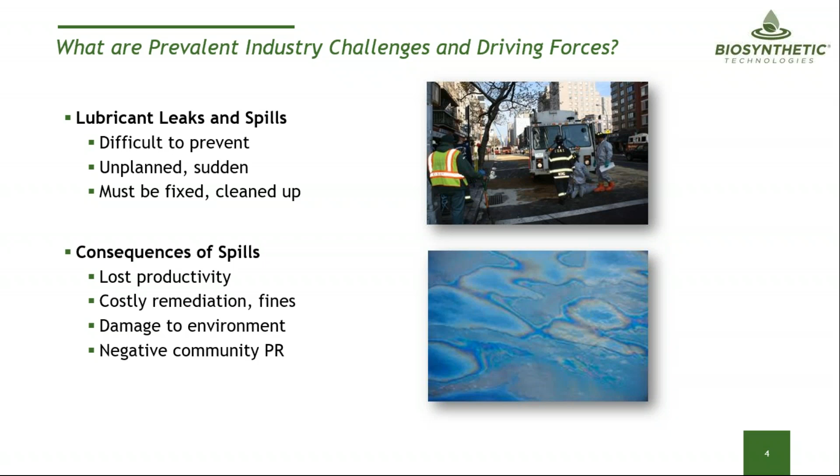So the risks from exposure vary everywhere from the extraordinary, which is a large, catastrophic, big spill that you read about in the newspaper and see in the news, and then the everyday little drips and drops that add up. And what we find is that the little everyday drips and spills can add up and become very common, but add up to become a real problem in the environment, whereas the catastrophic issues with catastrophic spills are well known and very easy to see. And the leaders of these organizations that want to do that are all clamoring for one thing, and they want to be kept out of the headlines with negative public relations.

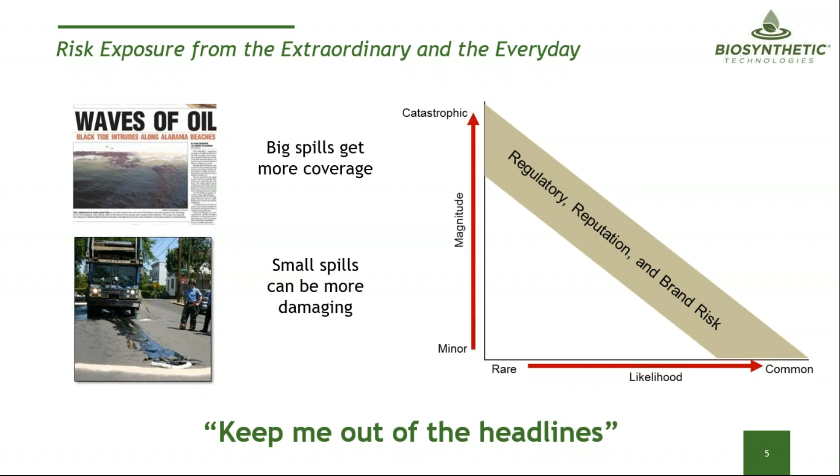So how can we do that? Biolubes can help.

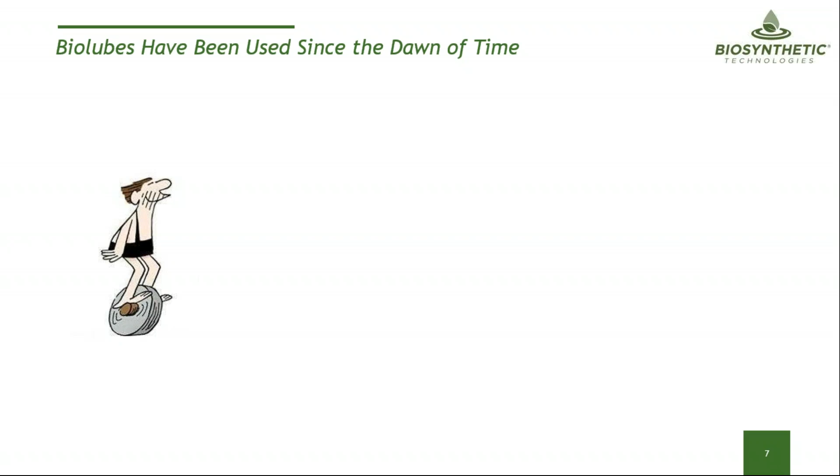Biolubes are not a new idea. They have been around since the dawn of time. It's not hard to imagine that early cave people utilized bio-based lubricants to lubricate their first wheels. It's even easier to imagine that the Trojan horse was lubricated with some type of bio-based lubricant, and they seem to work well.

But it's only recently that biolubes have been able to withstand the tortures and extremes of modern applications. The new lubricants have higher oxidative and thermal stability. They offer enhanced wear protection. They're being tested for long-term durability testing. It's not only important for standard industry tests to be run dry, but also wet. Formulations must be retested regularly, and each and every component within a system, whether it's a hydraulic system or a gear system or an engine system, must be evaluated to make sure that a biolubricant works as well as its conventional counterparts.

The formulators of bio-based oils have gotten smarter. The technology has changed.

These products are being developed specifically for their application in mind. A lot more testing has been done. More emphasis has been focused on compatibility, not only with all the individual components, but also what happens when there's contamination from other types of lubricants. Also important is utilizing the right product in the right application.

You might be able to use a vegetable-based lubricant in a light-duty application like a lawnmower or a reel mower, but you certainly couldn't put that into a heavy-duty truck or a mining piece of equipment. The lubricant manufacturers have been working much more closely with the OEMs, the original equipment manufacturers, demonstrating over the span of time field-proven performance.

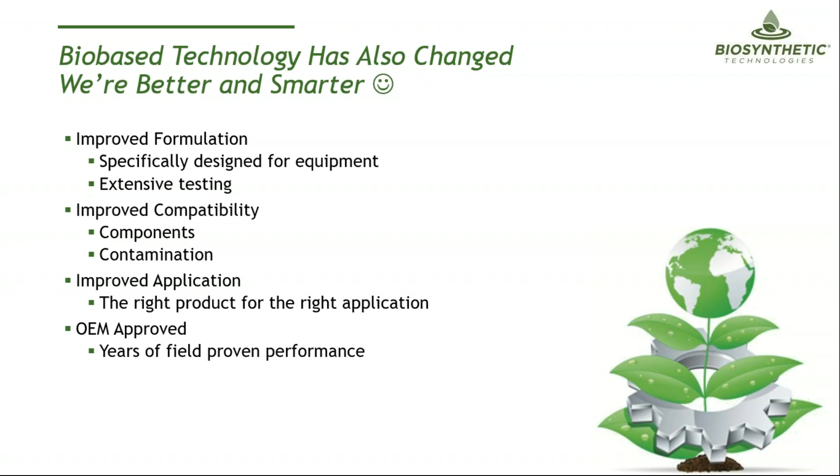Sustainability used to be a very easy benchmark for most people. Several decades ago, when somebody was claiming sustainability, they were looking for renewable content or bio content. They wanted it to be biodegradable and not so toxic, so it's safer for the environment. That was phase one. Phase two was, well, it's got to work in the equipment, so it must be as good or better than petroleum-based products.

Goal number four is it's got to be price comparative. And as the interest in sustainability has been exploding, we're now analyzing carbon footprint, life cycle assessment, and what is the social and economic impact of these types of products.

At Biosynthetic Technologies, we believe in circular sustainability. We're searching for carbon negative manufacturing, sustainable agriculture, and sustainable economy. So how do we approach that?

Well, we first start with the raw material aspects. Our raw materials, we try not to compete with food, and we look at crops that can be harvested multiple times from a single planting.

We're looking at carbon negative. For each metric ton of our biosynthetic products, we are consuming 9 tons of carbon dioxide. So when it leaves our gate, we call it cradle to gate or cradle to crate, it comes out in a carbon negative perspective.

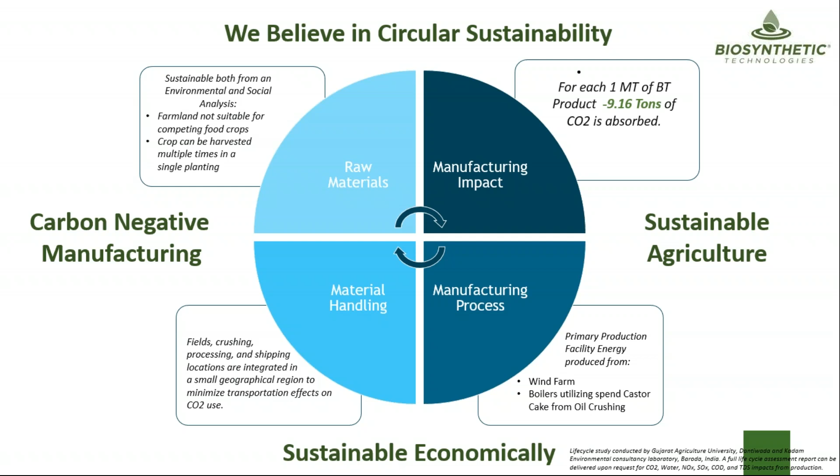Our material handling is located very close to where the plants are being utilized or grown. So we're not shipping beans and materials across a large amount of area, thereby continuing to reduce our carbon footprint. Also, our manufacturing facilities utilize wind for the electricity and operate their boilers by using crushed cake from the oil crushing.

There's a lot of confusion in the industry because there are so many different types of eco-label specification. The United States EPA has their vessel general permit. The United States Department of Agriculture has their bio-preferred program. There's the eco-label, the Nordic Swan, German Blue Angel, just to name a couple of them.

The ISO standards and classifications classify really 4 types of environmental fluids, and then some newer developed ones. So there are hydraulic environmental triglycerides, HETG, which are basically vegetable oils. There's the polyalkylene glycols, the HEPG. There's a variety of synthetic esters, HEES, and now there are some new secondary esters, which are called estolides, and that's the type of molecules that Biosynthetic Technologies works with mostly.

And then there's also polyalpha olefins and related products that are called HEPR. There are also some newer eco-hydrocarbons or renewable hydrocarbons on the market that also offer environmental acceptability, that are not classically defined by the ISO standard.

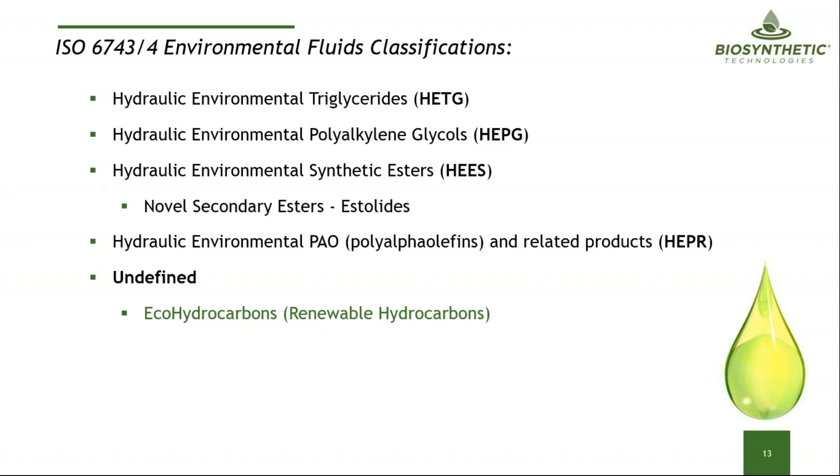So when you're selecting a biolube for your fleet, what are some of the things you need to look at? Well, you want to make sure that it's sustainably sourced, very importantly, that it is readily or ultimately biodegradable, that it meets ecotoxicity standards, that it's non-bioaccumulating, that it has good oxidative stability, which means the ability to work with heat and long durability. There's hydrolytic stability, which is the ability to withstand water.

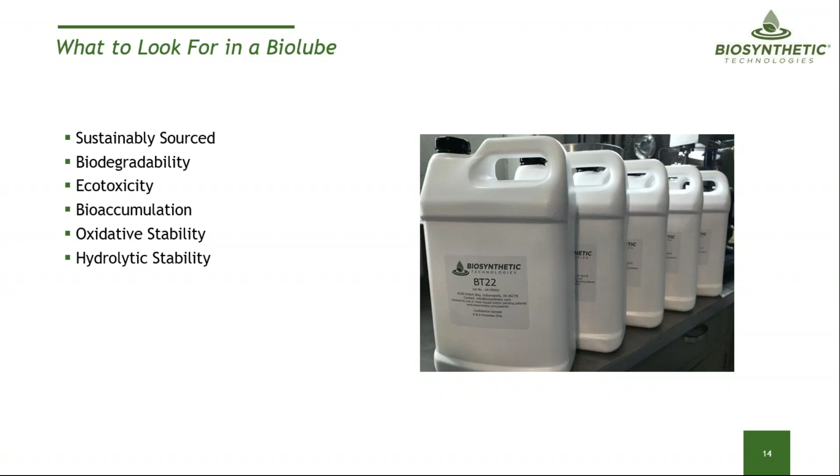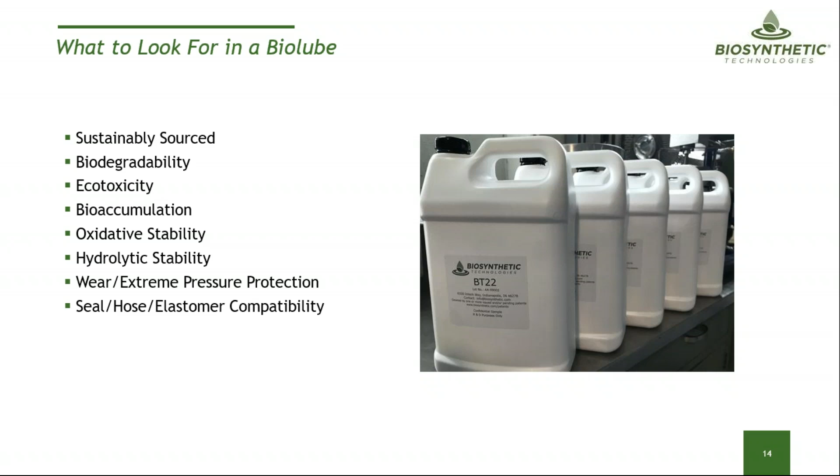It needs to handle extreme pressure and wear of modern equipment. It needs to be compatible with seals and hoses and various elastomers. And you need to find the right product for the right application.

Here's a chart that shows some of the things you want to look at and where the applications are, where you would utilize it. Vegetable-based oil can be used in a light duty, short change-out interval, low operating temperatures. Polyglycols are extremely fire resistant, but need to be especially designed for their system.

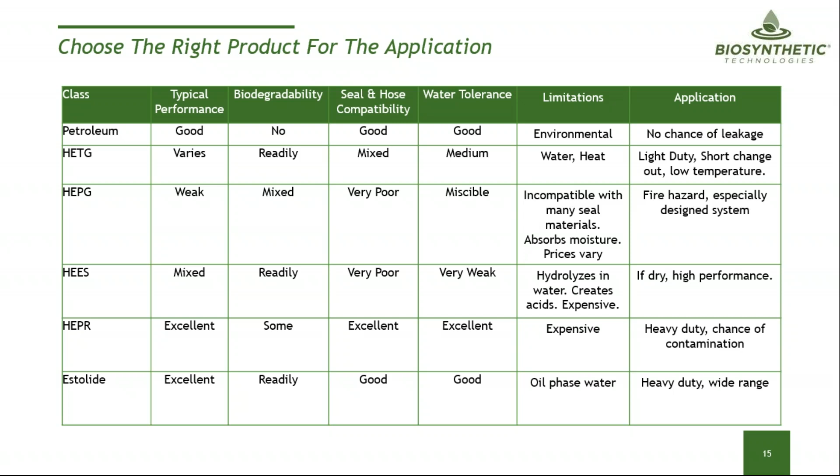Synthetic esters, for the most part, work really well when it's dry and offer good oxidative stability. The HEPR, the PAO, and related products can handle heavy duties, and even when there's a chance of contamination from petroleum. And the estolides offer a good range of performance, offer heavy duty application for a wide range of applications.

There are a lot of applications in clean fleets, starting with engine oils, but also hydraulic fluids, gear oils, driveline oils, greases, tractor fluids, cleaners, and absorbents.

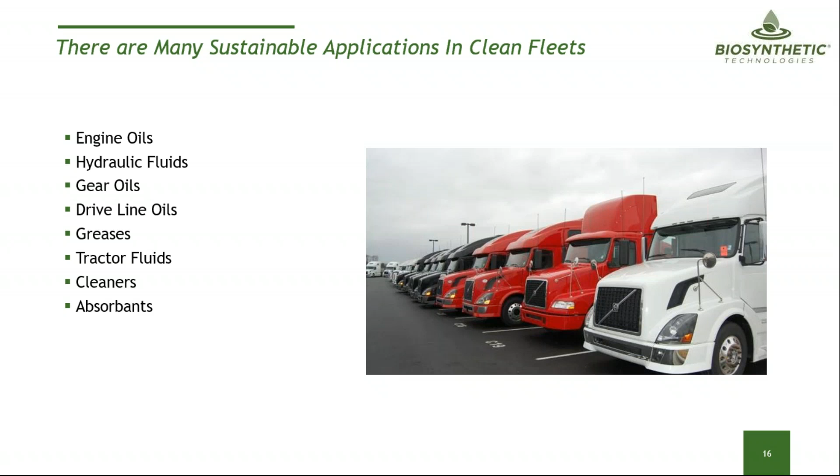I'd like to talk a little bit about bio-based synthetic passenger car motor oil. Biosynthetic Technologies has an API, American Petroleum Institute certified SN-RC 5W-20 and 5W-30 motor oil. That makes up a large amount of the motor oil sold in the United States. It is approved by the American Petroleum Institute and is available for sale on Amazon.

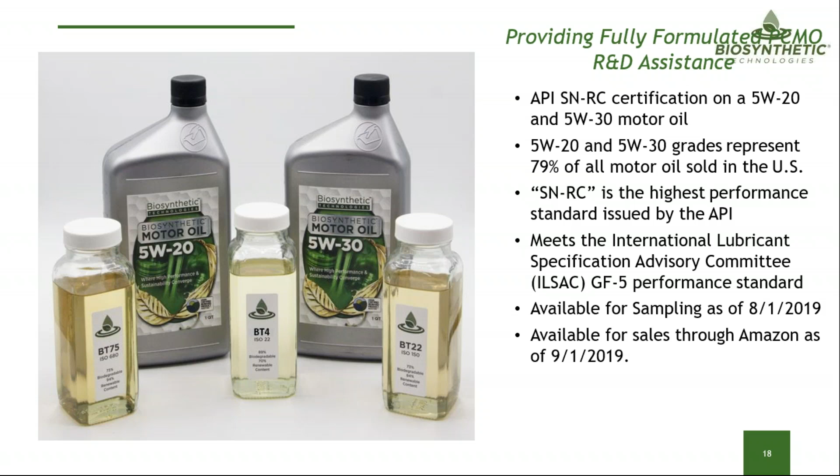We did a test, we've done multiple tests with this. One test we're very proud of was a 150,000-mile taxi cab fleet under severe stop-and-go conditions in Las Vegas, Nevada, which is hot and dry. You can see the engine on the right is clean as if it was brand new, the engine which utilized the Estolide synthetic version. The engine on the left used a petroleum product, and you can see significant buildup of sludge and varnish. The change-out intervals in both the petroleum and the Estolides were targeted at 7,500-mile change-out, but frequently went to 10,000 miles because it's hard to get taxi cabs back home when they're out working and making money.

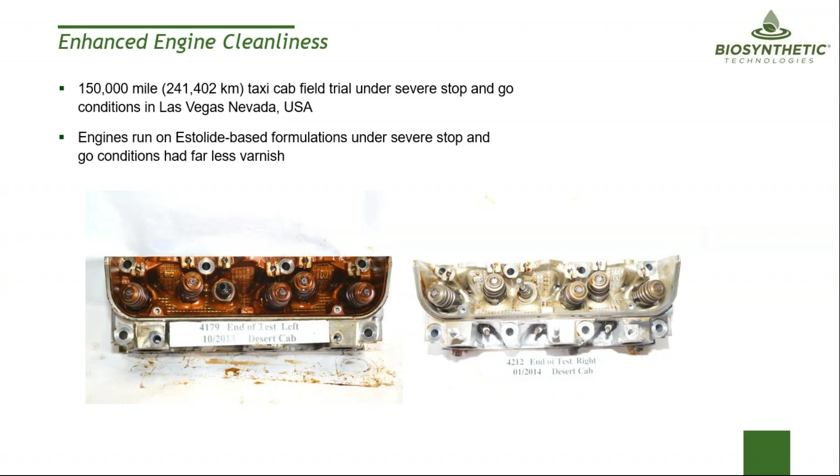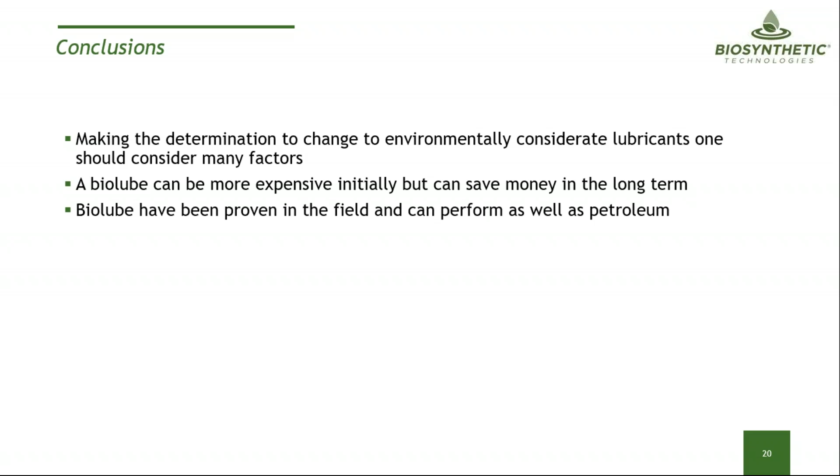So in conclusion, there's a lot to consider when making a determination to change to environmentally considerate lubricants. You've got to consider many different factors. Sometimes a biolube can be more expensive initially, but can save you money in the long term. Many different types of biolubes have been proven in the field and can show that they perform every bit as well as petroleum counterparts.

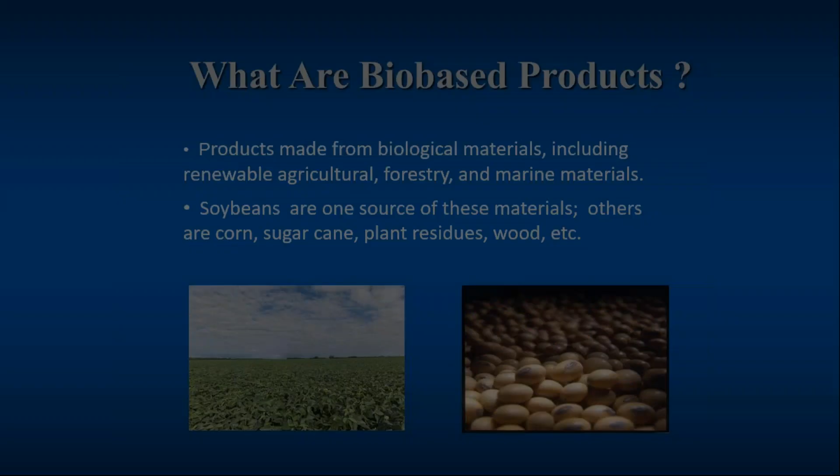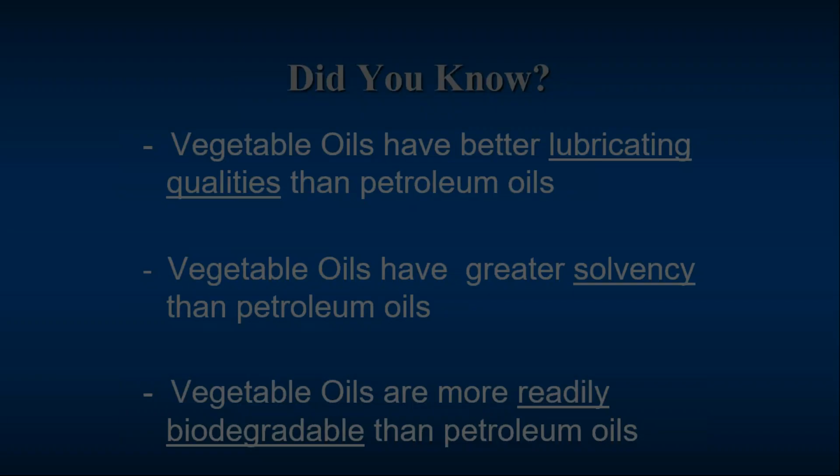I guess one thing we'd like to see is do people understand the benefits of vegetable oils? We always use petroleum oils, and now we're talking about vegetable oils, but vegetable oils actually have better lubricating qualities than petroleum oils. They have greater solvency than petroleum oils, and vegetable oils are more readily biodegradable than petroleum oils. Which makes them excellent substitutions for products that traditionally have used petroleum products. The vegetable oil products and the bio-based products are equal to, and in many applications, better performing than petroleum-based products. We'll see some of those applications as we go through this slide presentation.

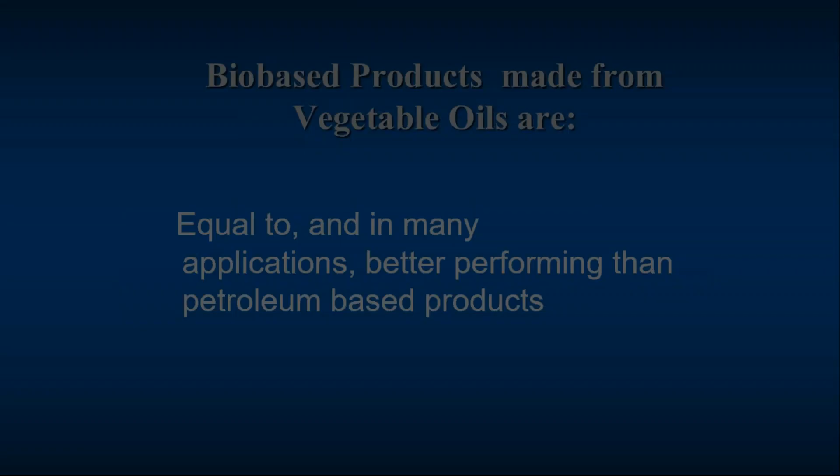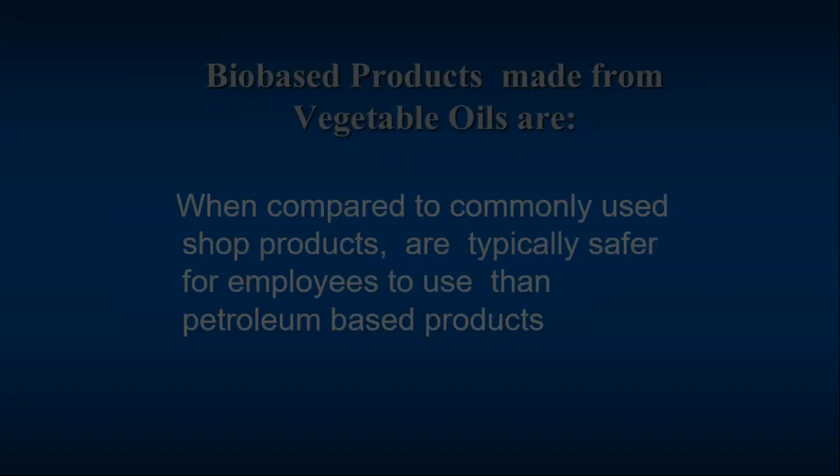One of the really cool things about the vegetable oil products and the bio-based products is when they're compared to commonly used shop products, they are typically safer for employees to use than the petroleum-based products. They're typically found to be more readily biodegradable and less toxic to the environment than petroleum-based products.

We found very much success in using these products at Pictured Rocks National Lakeshore when I was there as a facility manager and fleet manager. We started in 1998 to demonstrate the products. We got grants from the Department of Energy to purchase products that were in development. These products weren't available on the shelf yet. As Mark explained, they'd been in the making for over 20 years, and we started utilizing them when they became available to see how well they worked.

We started off with biodiesel, typically running the B20 blend, although we did use up to B100 during the warmer seasons. What was really interesting about Pictured Rocks is that it's up in the Upper Peninsula of Michigan, so we were in cold country, and we demonstrated the successful use of splash blending of biodiesel in cold climates.

We were able to find hydraulic fluids and put them in our lifts, the lift devices on our plow trucks, the hydraulic systems of our backhoe loaders, and certainly floor lifts. We did have a spill or release one time with one of the floor lifts, and what we found was the regulators were less intense toward the cleanup activities in getting those releases mitigated.

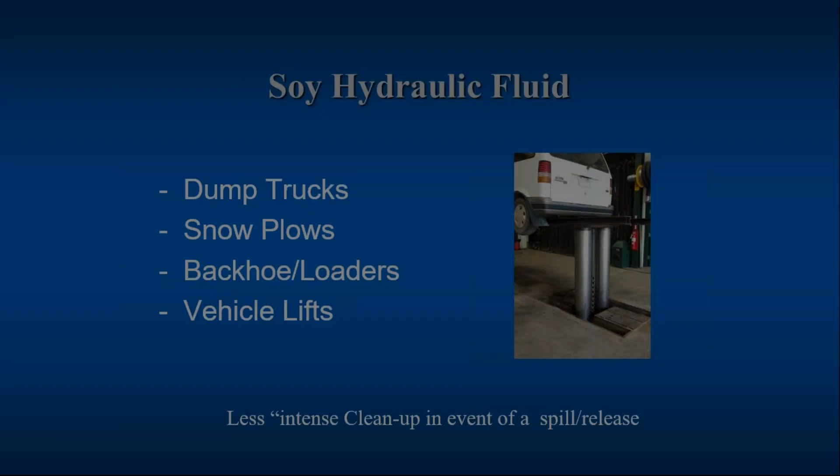We found fluids and suppliers that could manufacture fluids we could put in our backhoes, crawler dozers, graders, and utility tractors. We were putting them in basically anything we could find a compatible fluid for.

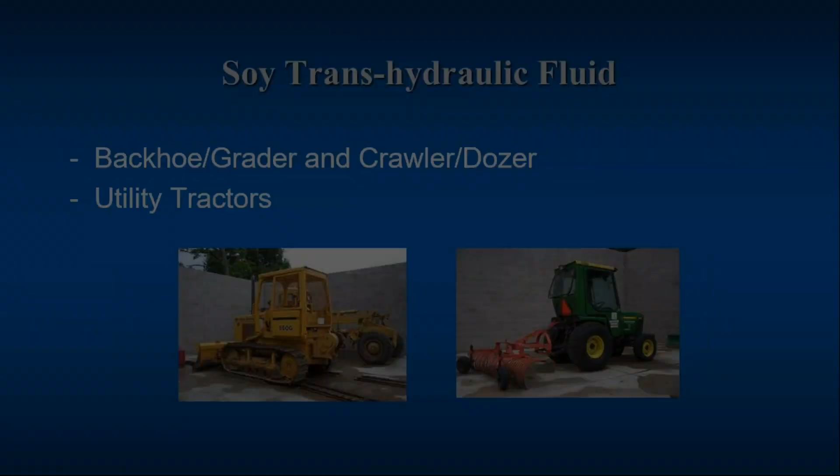We used trans-hydrostatic fluids in our small tractor mowers for our Class A grounds areas. In the event you've got a Class A grounds area, you don't want to mess it up by killing the grass from a spill or leak from your tractors on those properties.

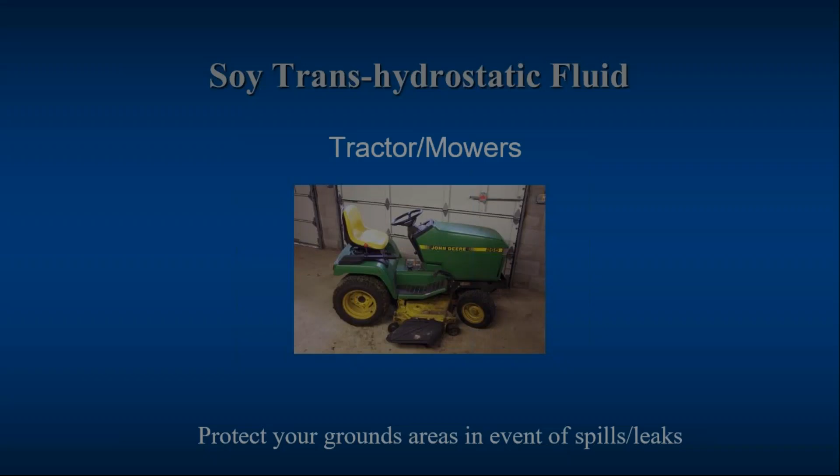We use 2-cycle engine oil in our mowers and trimmers, on our patrol snowmobiles, and in chainsaws.

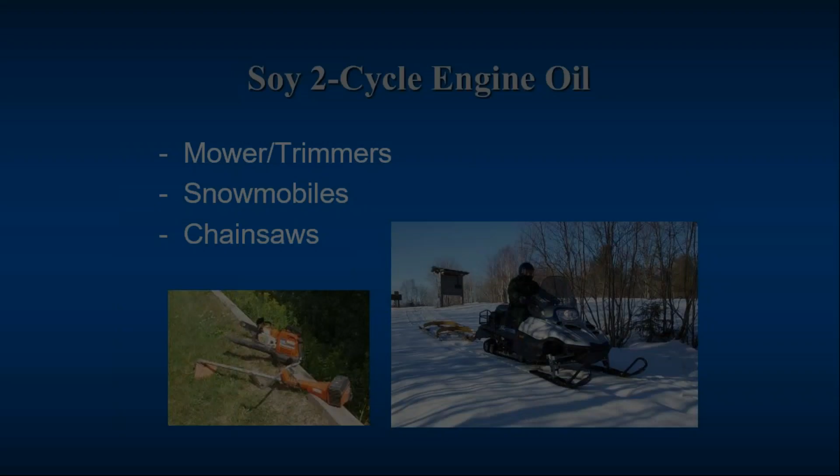An interesting thing about 2-cycle engine oil, it really brings it home when you think of an outboard motor. The first thing that happens when you start it up is the oil burns as it goes through the cylinders and lubricates them. It creates a large amount of smoke, and you also see the exhaust from that burnt oil going out into the water—basically like dumping a quart of oil directly into the lake. With a petroleum product, it doesn't degrade, or it takes a long time to degrade. A bio-based engine oil will still smoke and still be released into the water, but it's much more readily biodegradable, creating a lot less environmental footprint for the operation of that 2-cycle boat motor in the water.

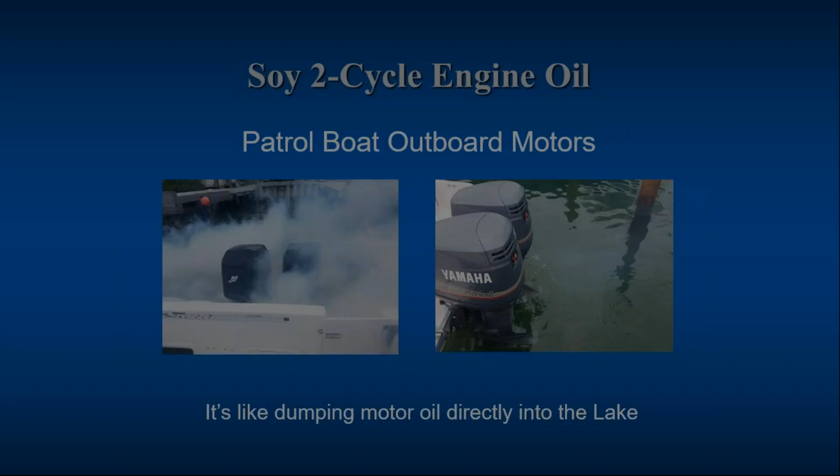We use it on our chainsaws, not only in the engine for the gasoline mix but also on the bar. Every drop of oil you put in that chainsaw to lubricate the bar gets thrown out into the environment, so it behooves someone to use a product that's much more readily biodegradable.

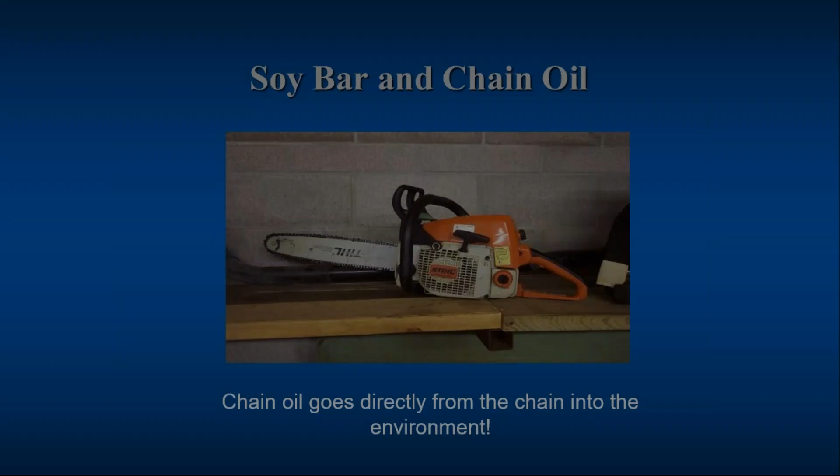Number 2 chassis lubricant—we were able to find a manufacturer that could provide number 2 chassis grease, and we were using that successfully in our vehicles for general lubrication.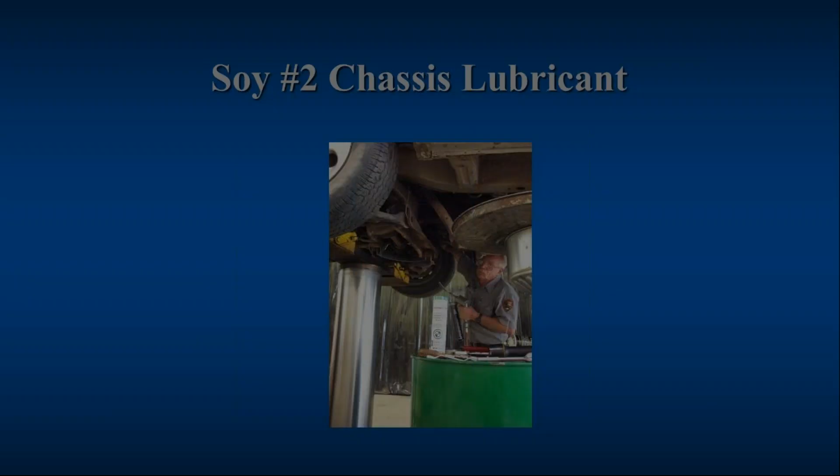One of the most significant products we were able to find is a parts washing fluid that we could put in our parts washing tanks. The flash point is 300 degrees, so it's non-flammable. It's very low VOC, meaning when you open the tank up, you're not exposing everybody in the shop to those VOCs, and people aren't getting headaches from using a parts washing tank. We found the performance equal to the solvents typically used in those tanks. So it's a win-win-win for everybody in that application, particularly the health and safety of the employee using it.

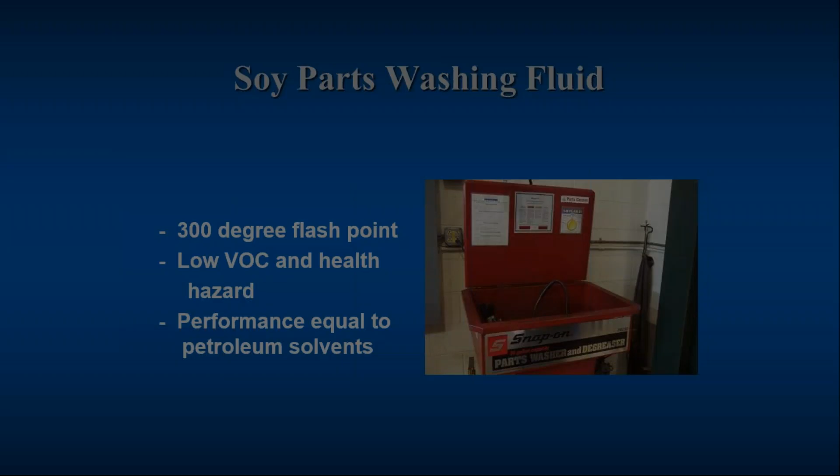The penetrating lubricants, because of the solvency and lubricity of the vegetable oil products, penetrate the threads—they actually creep up into the threads. It has a high flash point, so it doesn't flash up if you have to hit the nuts and bolts with a torch after trying to loosen them. It doesn't evaporate off as readily; it stays with the application where you put it, leaving residual lubrication, and it also acts as a water displacement.

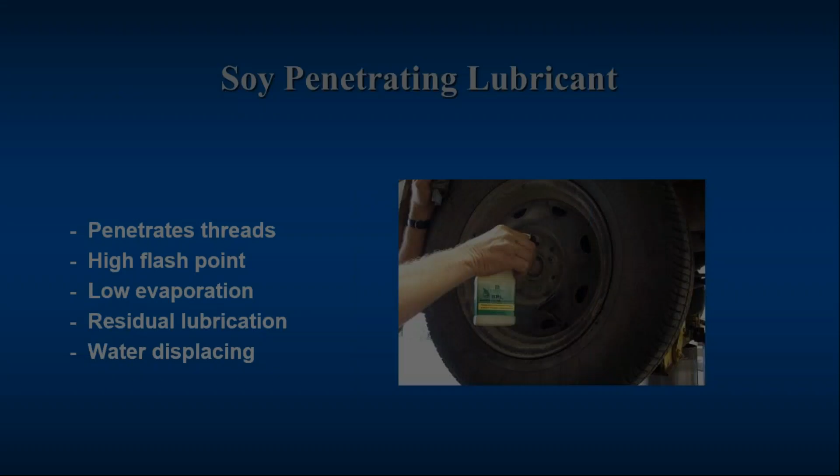For more than 12 years, Pictured Rocks had demonstrated the use of bio-based engine oil in diesel and gasoline vehicles. This was back in the early 2000s, when manufacturers were trying to develop this oil. It hadn't reached the point of being API certified until Mark's company had the oil certified, and now it's commercially available as an API certified product.

So the use of this engine oil isn't brand new. It's been around, and just like Mark said, they tested it on a Las Vegas vehicle fleet. We had tested it early on in cold temperatures up in northern Michigan.

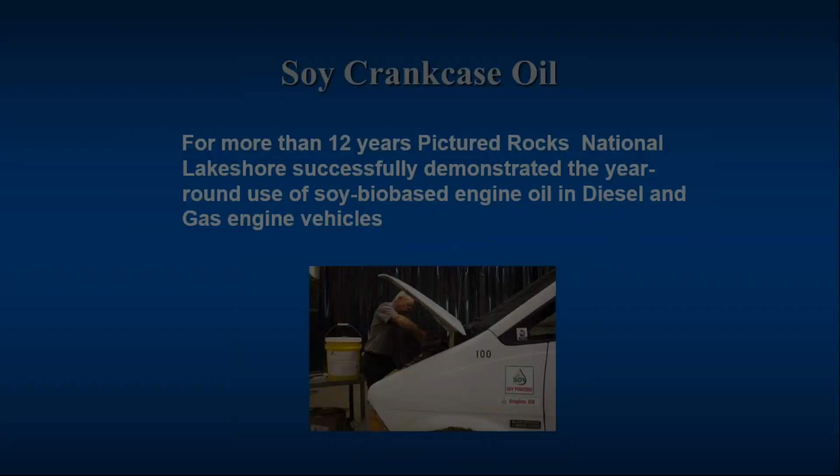Pictured Rocks isn't the only organization using these products. A number of national parks, cities, and communities have been using bio-based products. An interesting application has been at both Logan Airport and the New Jersey-New York Port Authority, where they've taken all the petroleum products out of their vehicles and put bio-based products in, including engine oils, hydraulic fluids, and antifreezes. Any lubricating fluid in those vehicles was removed and bio-based products were put in, and then they put signs on those vehicles to show the public the good work they're doing toward sustainability. They've gotten a lot of mileage out of showing off these things they're doing with greening the vehicle.

Soy oil isn't only used for cleaners, solvents, and lubricants. Goodyear, in the last two years, now has four tire lines that utilize soy oil in their tread manufacture, replacing 60% of the petroleum oil in the tire. They found better flexibility and traction at low temperatures on the tread itself, which makes them perform extremely well. They have a law enforcement high-pursuit type tire used in law enforcement and emergency vehicles because of that traction and ability to stick to the road. It also improves manufacturing efficiency and energy use, because they don't have to heat the tire material to a high temperature to form the tire, so they're saving energy in the manufacturing process.

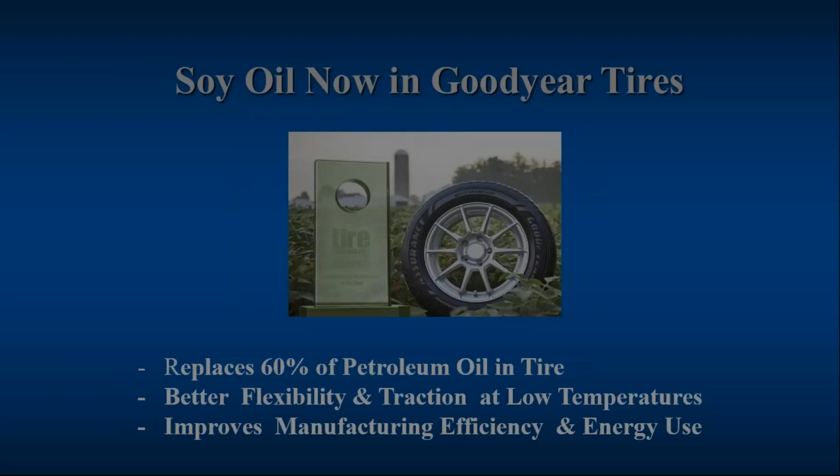When you consider the benefits of bio-based products, we have proven performance, improved employee health and safety, and increased environmental stewardship. Those are all reasons for you to try bio-based products in your fleet. Don't be afraid to try them. They work.